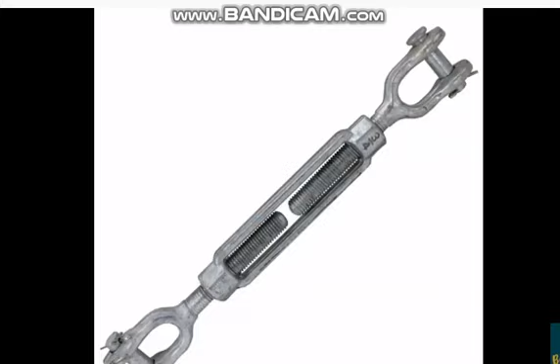Turnbuckle, or it's also sometimes called a coupler. This is a mechanical joint used to connect two members which are subjected to tensile loading. These are normally only under tensile loading. I don't think compressive loading comes on this.

And these are used when slight adjustment in the length is necessary. Length, you have to reduce or you have to increase, then you will be using it. Or when some adjustment in tension under the loading conditions is needed, then you will be using this.

This is consisting of a central hexagonal nut, but it is not necessary that it should always be a hexagonal nut. It can be circular also. Centrally one nut is there which is called a coupler, and tie rod having right hand and left hand threads.

A coupler of hexagonal shape is to facilitate the turning of it with a spanner, or if it is not hexagonal, then some hole is provided in that coupler or nut, so that with a Tommy bar, as you have seen in the video, it can be inserted for rotating it.

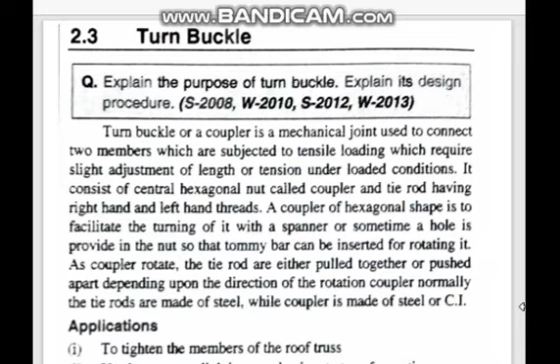So see the applications of the turnbuckle. To tighten the members of the roof truss. Truss means what? In the overhead, in big sheds and factories, where the roof is made of trusses, and there you have to tighten the members. Then you can use the turnbuckle, and use it to connect links in a mechanism to transfer motion.

Another example is it is used between two railway wagons or bogies, and to tighten cables or stay ropes of electric distribution poles. Electric distribution pole means our electric pole is there, either made of cement or iron, and it should not bend towards one side, so therefore we put a stay rope. That stay rope also sometimes may become loose, then you have to tighten it, so you can use a turnbuckle.

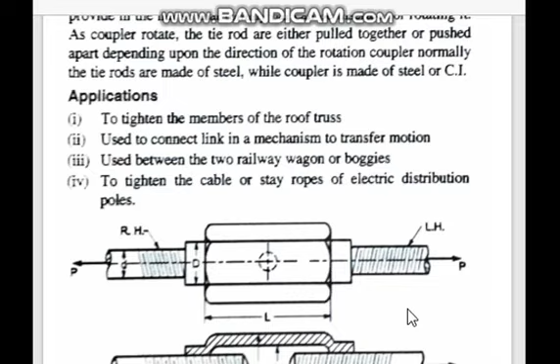So turnbuckle, you see, it has here a hexagonal nut. On this side you have a right-handed thread, RH means right-handed, this is the rod. On the left, on this side it has left-handed threads.

And the nut is provided here. Here there is a nut so that this screw may go in, and here there is a nut that this screw may go in. This is a hexagonal one. I don't think this is the front view of it.

You see there is a circular hole provided here for putting the Tommy bar. This appears to be more a circular coupler here, not a hexagonal shape. See here, this portion from here to here is the nut, and here this is the screw. Wherever there is a screw, there should be a nut.

You may say there are screws which we put in the wall or in the wood, there is no nut there. In that case, the wall or the wood itself is working as nut. But wherever there are threads on a screw, there should be a corresponding nut. So here, if this is the right hand thread, this will also be a right-handed nut. If this is a left-handed thread, this will be a left-handed nut. Inside, the threads should be cut in that way.

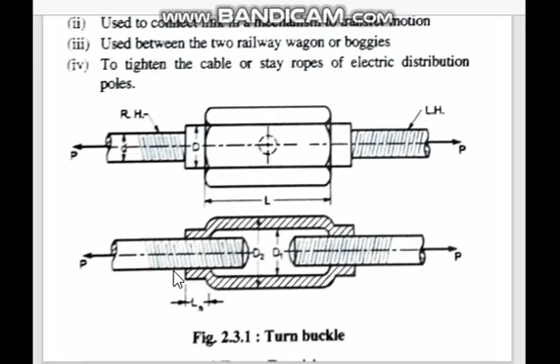Actually, if there are threads, then in the threads there is an outer diameter and an inner diameter. Outer diameter is called DO, inner diameter is called DC, meaning core diameter. If it breaks, where will it break? It won't break where the diameter is more. It will break where the core diameter is, where the diameter is less. DC will be lesser than DO.

Therefore, we should design considering the least area, which is at DC. The axial tensile load is P. The rod is subjected to tensile stress. Also, due to twisting moment, sometimes it may twist, and some twisting may come into the tie rod.

So the tie rod is designed considering only the tensile load, but it is increased because this twisting moment is coming. So instead of just P, we use PD, which is the design stress or design load. D stands for design, P is the load we know. Design load we take as 25% more than P, meaning 1.25 into P. Though so much we are increasing the load, then we take it.

In other joints, we have directly taken P. So how does it fail? It fails in tension. The strength equation is tensile stress sigma T equals load upon area. So here, because we are considering the design load, it will be design load upon area, where area is pi by 4 DC square.

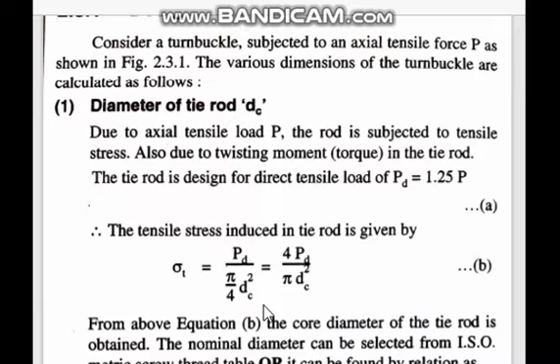So if P is given, we can find out PD, and sigma T will be given in the problem. Therefore we can find DC, the core diameter. Once the core diameter is obtained from this equation, the nominal diameter or outside diameter can be selected for ISO metric threads from the table given in design data books.

Every designer will have a data book, he can refer to it. But if you don't have one, suppose in your exam you won't have a data book, so this is the formula that you can use. This I may ask you in the quiz question.

What is the relationship? DO, which is the nominal diameter or outside diameter, is DC upon 0.84. That means what? Which is more? DC should be small, DO should be more. If you take it the other way, DC is equal to 0.84 times DO.

So remember this formula. The outside diameter can be found once you know the core diameter. Suppose somewhere else you know the outside diameter and want to find the core diameter, you can use this formula.

Now coming to the next step, that is the length of the coupler nut. Length of the coupler nut, how long it should be, considering the direct shearing of the thread at the root of the coupler nut and screw. Now here shearing takes place.

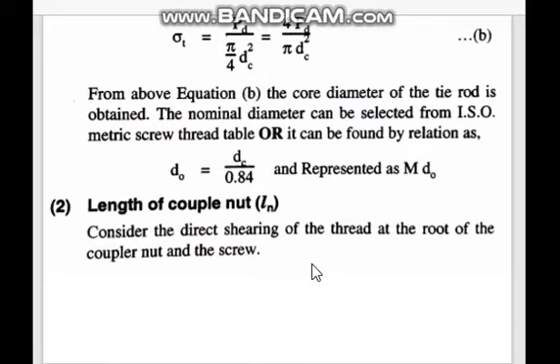Now here the shearing takes place. Suppose we are pulling this side. Here, inside this nut, few threads are in meshing with the threads of this rod. It may so happen that this may pull it apart and come out, meaning all the threads here are sheared. Sheared means they cut loose and came off. That is what is happening here.

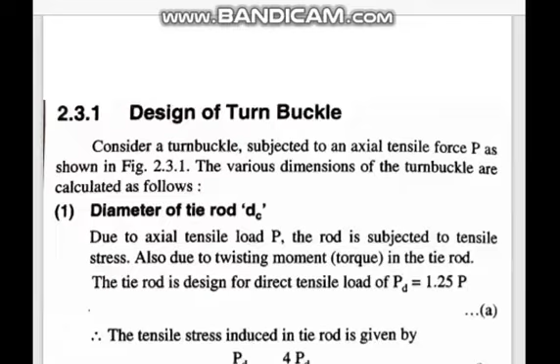Direct shear stress is induced in the screw thread and direct shear stress is induced in the nut. First let us see about the nut. Where will it be shearing? The nut will be shearing at the outside diameter DO, for a length Ln, and at the periphery, therefore it is pi DO.

The shear stress in the nut, N meaning nut, tau is shear stress, is load upon pi DO into Ln. This is the area of shearing. Whereas in the screw, the shearing takes place at the core diameter.

In the screw thread, the shearing takes place at the core diameter, so this should be DC. What is DC? Core diameter. What is DO? This is the outside diameter or nominal diameter. And Ln is the length of the nut. So these two equations you are having.

Suppose the screw is made of steel, so this shear stress will be of steel. If this is made of cast iron, this shear stress will be of cast iron. If in the problem both are same material, these values will be same.

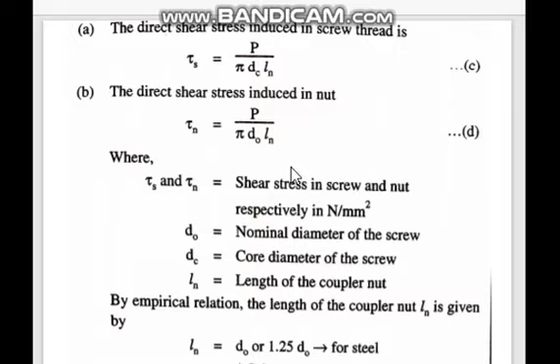But here, you have to use these two formulae to get the value of Ln, because you know both DC and DO. By empirical relation, the length of the coupler is taken as either 1 times DO or 1.25 times DO if it is made of steel. If the coupler is made of cast iron, this length of the nut will be taken as 1.5 times DO or 2 times DO.

You may ask, should we take 1 times DO or 1.25 times DO? It is up to you. I told you before, everybody will not be getting the same answers in design. It depends upon the individual person, what values you are getting. Just because you have taken 1 DO, nobody is going to mark that as a wrong answer. So the length of the nut can be calculated like this.

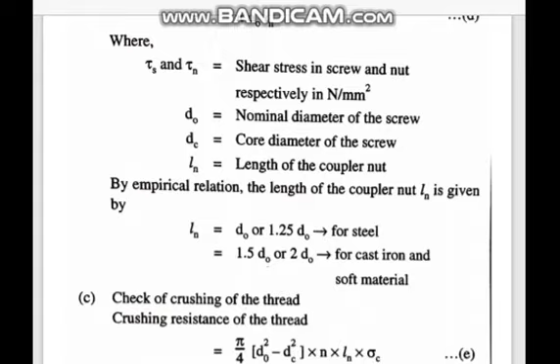If you are calculating the length of the nut according to the empirical relation, then what use is this? This is used for finding out the induced shear stress. Once you find the induced shear stress of the nut and of the screw, you should check whether they are within the permissible limits. If they are within permissible limits, the design is okay. If it is outside, you will have to increase the area by changing the dimensions.

Next step is checking for crushing of the thread. Crushing stress also is induced. For crushing, it is taking place in the threads, which are like concentric circles. So the area will be pi by 4 times DO square minus DC square, and this is for each thread. How many threads are there? There are n number of threads.

What is the length of the nut? Ln, and crushing stress is sigma c. So this is the crushing resistance of the threads. This should be equated to our design load, and equating from this equation,

you can find out n. N is how many number of threads should be there. N is number of threads per length, which is Ln upon p, where p is the pitch.

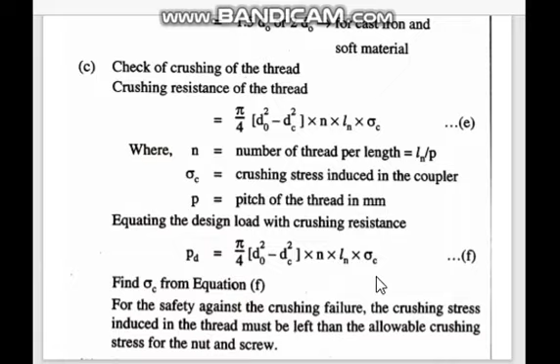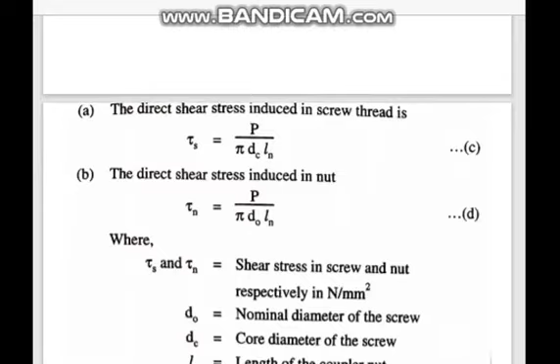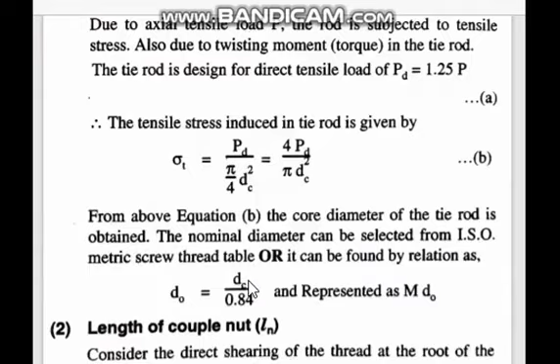Then, the outside diameter of the coupler nut. Outside diameter means, this diameter here is given as d2. Sorry, this is the nut, and Ln is this length of the nut. We are not considering the total length of the portion where there are no threads inside; threads are there for a shorter length only. What we are finding out is capital D there, the outside diameter of the coupler nut.

The coupler nut is subjected to direct tensile load and a torque T. But considering the shearing of the coupler nut due to tensile stress induced in it, in order to account for the torque, the tensile load is taken as PD. Actually tensile load and torque both are coming, but to make things simpler, we are not going to consider torque. We will be considering only design load.

We are increasing this load by 25% to take care of torque also. That's why we use PD, the design load.

So the tensile stress induced in the coupler nut is given by this formula: sigma T, tensile stress, is equal to design load upon area.

Area is like concentric circles only, no? Pi by 4 d square minus do square. Why do square, why not dc square? Because if you take do only, this area comes less. Least area we should take. If you take dc, the area will be more. You draw it in the diagram and think about it.

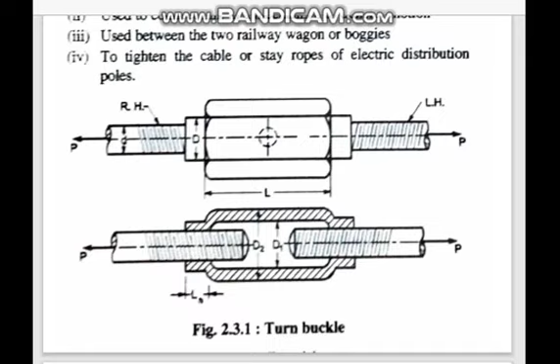The coupler outside diameter is D2 and inside diameter is D1. What we are finding out now is the coupler's outside diameter D2. What about inside diameter D1? Inside diameter D1 is taken as outside diameter of the screw threads plus 6 mm. This is an empirical relation. D1 is the inside diameter, so this is fixed, we will not be doing anything for this.

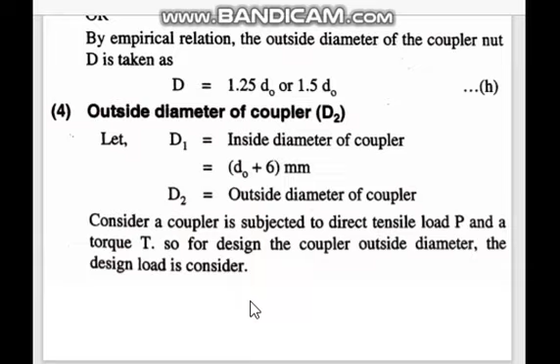Let us see about D2. Consider the coupler subjected to direct tensile load and a torque. So for designing the coupler outside diameter, the design load is considered. The tensile stress induced by the coupler is given like this: the tensile stress induced in a coupler, sigma T, is design load.

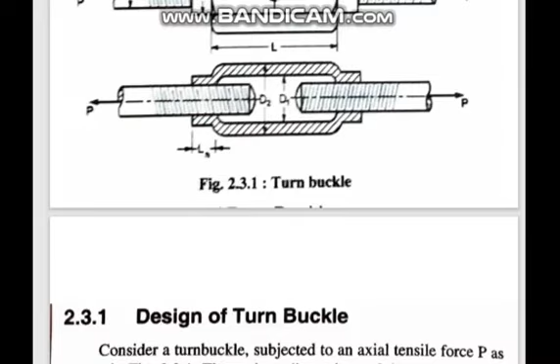Capital D2 square minus small d1 square. This will be the area where it fails. I'll show you where it is failing in this diagram. If it is tearing like this, the resisting area will be pi by 4 d2 square minus d1 square. That will be the resisting area.

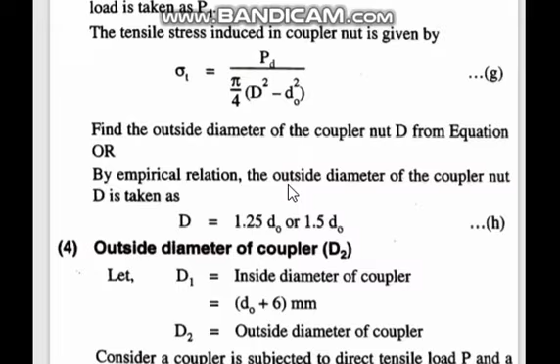From this you can find out d2. Otherwise, there is an empirical relation: for d2 we use 1.5 times of small do, or 1.75 times of do. This we can use.

But if we are using this and finding the value of d2, then what will you do with this equation? We have to find out the induced shear stress, induced tensile stress, and check whether this is less than the permissible tensile stress or not. If it is less, it is safe.

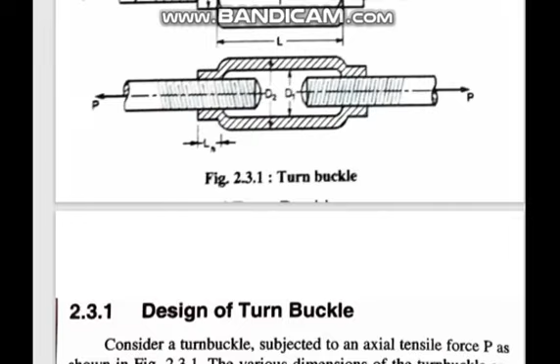Then next we come to the remaining things: the length of the coupler nut. First, length of the coupler nut - this is not ln as shown here, this should be L. Let us see in the figure what is given. Yeah, this is the length L, capital L. This we are using as ln, but ln we have already found out here.

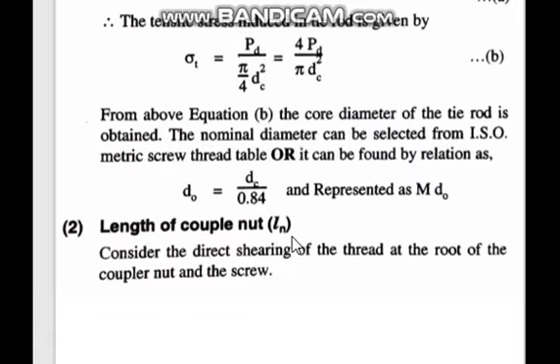Some of the notations they have given wrongly. So length of the coupler, it should not be coupler nut, length of coupler capital L should be 6 times of DO, according to the empirical relation. And the thickness of the coupler we have already got - you see this is D2 minus D1. There is no need of thickness again. You see these 6 and 7 are unnecessary steps here.

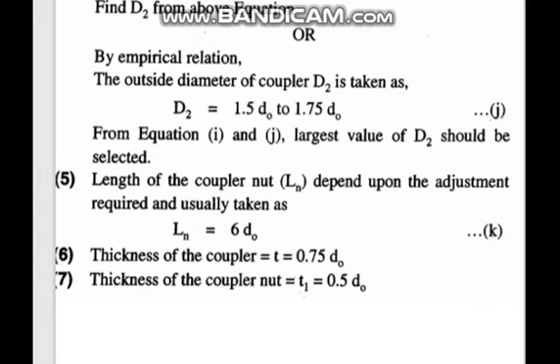Our design finishes with step 5 itself. So with this, this is the design procedure for the design of the turnbuckle. Okay, that's all for today. Thank you.